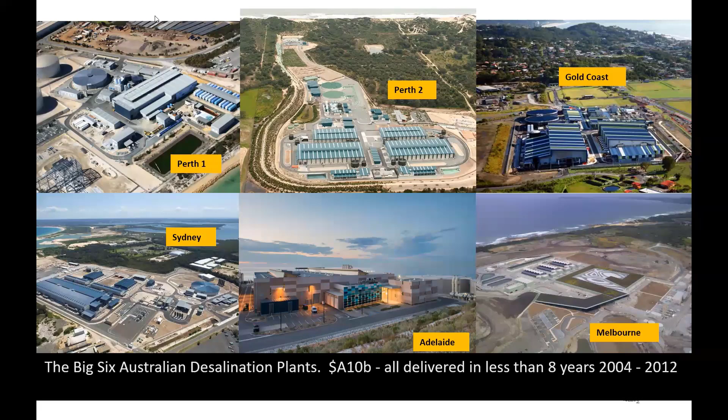The reason for the investment of $10 billion in water security measures was the millennium drought. It actually went for 13 years, from 1997 to 2011. This shows the rainfall for the period 2001 to 2009. You can see much of southeastern Australia is dark red, which is lowest on record. The drought broke in 2011 with floods in eastern Australia, which coincided with the completion dates of some of the desalination plants. Here are the locations of the Big Six. You can see they're spread, 2 in Perth and 1 in each of the mainland state capitals of Australia.

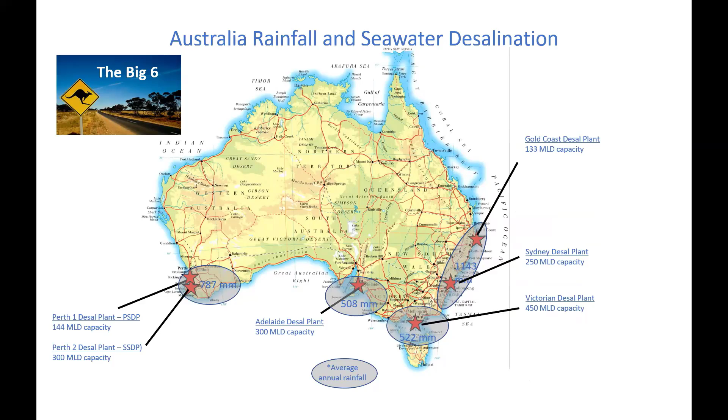If we move on, Perth's an interesting case study of climate change. Gary. Okay, as you can see, even though the precipitation didn't reduce that much, inflow reduced dramatically. From the early 1900s or 1941 right down to present, the runoff has gone from an average of 500 gigalitres a year down to as little as 40 this recent year. A few years ago, it was as low as 15 gigalitres. If you realize Perth uses 300 gigalitres a year and we only have 15 gigalitres flowing in, we've got a problem.

In the 70s, they started bringing in groundwater because they could drill to deeper depth and access deep groundwater, a kilometre below ground level. And in time, that was also depleting due to climate change, and demand was increasing. So in the early 2000s, along came desalination, which you can see in the orange colour. And more recently, a very small component is groundwater replenishment, which is also a form of desalination, just brackish water desalination. With the new plant about to be constructed at Alkimos, by 2028, almost 60% of Perth's water will be from desalination.

I just want to talk about a case study in Melbourne. Melbourne desalination plant was built. It basically languished for 5 years after commissioning without being used. It's quite large, 150 gigalitres a year. It's about a third of Melbourne's annual average water demand. Now, in 2017, we had an interesting severe drought for 3 years, 2017 to 2019. But we'll come back to that in a moment.

I've got some theoretical work which showed what would have happened. The first chart on the left shows what would have happened if there'd been no water restrictions. During the millennium drought, it would have run out of water by about 2009. The actual results in that period, 2003 to 2009, the very severe water restrictions. Melbourne maintained some water in the dams. With extremely severe water restrictions.

And then in the red box, here's a prediction which we did based on, had the desalination plant been available, the dams could have maintained their level without restrictions. It's a very powerful water security device that's been employed. Now, we'll talk about the cost of it later on, but I just wanted to go through that exercise. Now, it wasn't available at the time. Now, here was a real exercise.

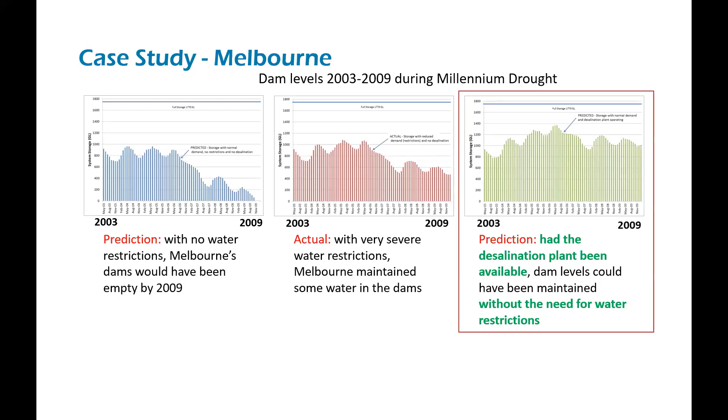And you can see on the photos, Thomson Dam is the principal water supply for Melbourne, and the Victorian desalination plant. So dam levels at the end of 2022 were 92%. It's been predicted without the desalination plant, they would have been at 69%, but restrictions would have been applied. So it did what it was supposed to do. It's like an insurance policy. You pay for insurance. You don't ever complain if you don't have a claim on it.

In this case, we operated the desalination plant in Victoria, and it continued to be one of the world's most livable cities, which is not the case if you've got severe water restrictions frequently, which was the case in the past. Just a note on the size of it. As Gary said, the capacity is 150 gigalitres a year.

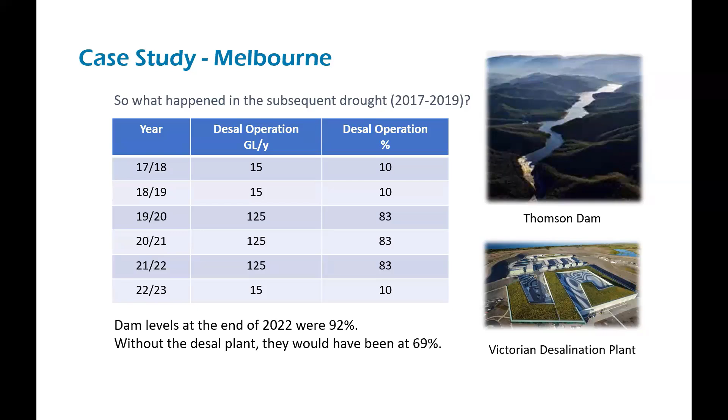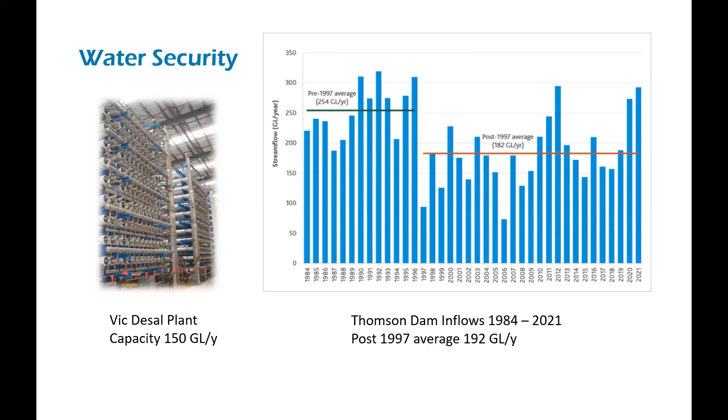If we move on, here's an update of what's likely to happen in the next 10 years in desalination in Australia. We work down from the Sunshine Coast desal plant, which has been announced as a serious contender by the Premier of Queensland.

You probably know there's a large recycling system in Queensland, the Western Corridor recycled water. It's worth 232 megalitres a day, but they're reluctant, I guess generally because of the yuck factor, to implement it. Don't know what will happen.

Belmont Desalination Plant is currently being approved and will be designed in 2024. Sydney Desalination Plant, it's been announced that there will be an expansion, a doubling of the size of it, which it was originally equipped to do. Victorian Desalination Plant, the next water supply for Melbourne is an expansion of Vic Desalination Plant by another 150 megalitres a day.

In South Australia, the Northern Water Supply, 260 megalitres a day, has been announced and will be proceeding, I think, in 2025, which will take water from Eyre Peninsula north to the mines of Olympic Dam, principally to reduce their dependence on Great Artesian Basin water. This is part of a hydrogen initiative for the South Australian government and will be completely renewably powered.

Then we've got the Alkimos desalination plant. And Gary, perhaps you can talk about the decision that led to that. Yeah, well, so first of all, Alkimos, I see we've got 250 megalitres, actually 300 megalitres a day in two stages of 150. In fact, the Water Corp is very, very proactive. So it's got plans for two desalination plants. One was a second plant adjacent to the existing Kwinana desal plant, also two stages of 150 megalitres a day.

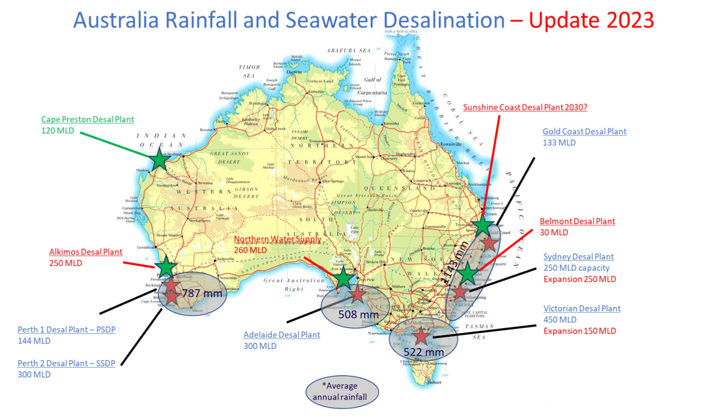And there's plans afoot for others deep into the future. There's also some plans, and I'll get into that later, on water recycling. Okay, but the important thing on this one is the decision was made, and at this stage, the technology favoured seawater desalination over water recycling. Okay.

This is just a list of those plants that we went through. You can see that in Australia, the expected increase in seawater desalination over the current Big Six is 65%. So I guess the policymakers and water utilities in Australia are saying that this is basically the way of the future to ensure water supply in the face of climate change and increasing demand through population growth. This also takes into account water efficiency measures, but with growth in population, there's an increase in demand that occurs.

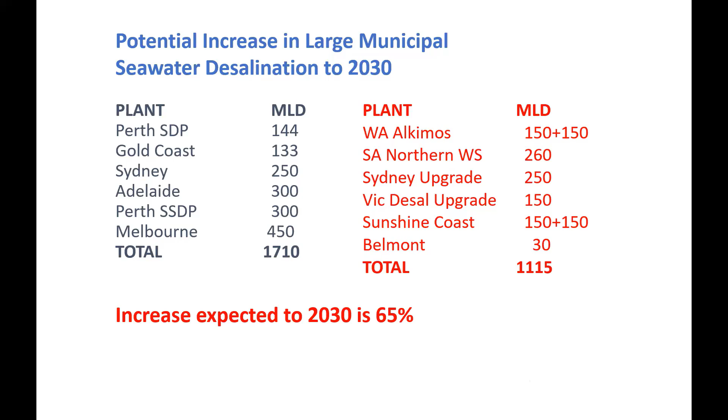If we look at some innovative types of technology that's being applied now. So Gary, back to you. Yeah, okay. And the reason we chose this slide is Neil mentioned earlier on in our pre-discussions about California being very strict on intakes, the abstraction of larvae and pulling in larvae and sea life into the intake. So in California, they're very strict on that. They cannot have open intakes, which we have, which is a velocity cap intake, or even a Johnson screen. They believe they cause impingement and entrainment.

So they've come up with this slant well system, and it's currently being contracted as we speak, even though they have been trialing it for about 15 years. It's at a suburb in Southern California called Dana Point.

It's going to be called the Doheny Desalination Plant, and this slant well goes into the sea. Initially, it's going to be pulling in some fresh water, so the plant's going to be designed to manage a mix of brackish and seawater, and ultimately pure seawater. So that's one way of getting around the very strict EPA regulations on open intakes. So that's one option. And I know the Water Corp is looking at those solutions for some of the smaller plants they're planning up and down our coast here.

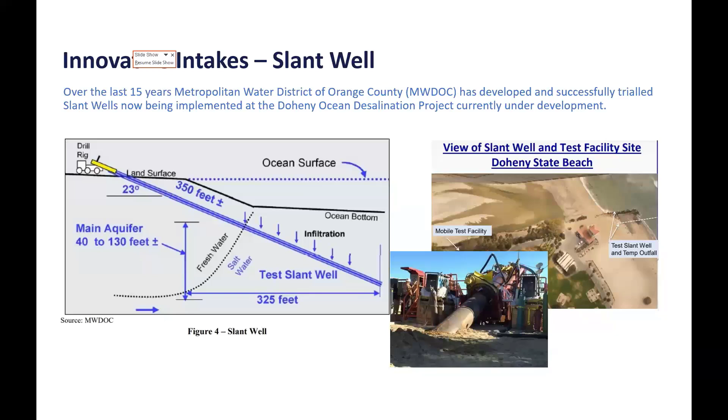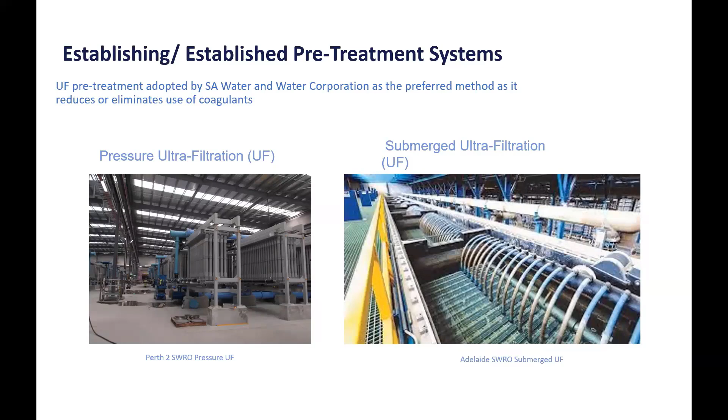We know that ultrafiltration has become fairly well established in pre-treatment. It's not that new anymore, but I've just put it down as the option moves away in places from conventional dual media filters and gravity filters or pressured media filters to ultrafiltration. But this is my segue into the next slide, which is, I believe, where we're going to end up in the future, and that's ceramic membranes for seawater pre-treatment. They've already been used for lots of applications in the food industry and in water treatment, but not so much for seawater desal yet, but there are moves afoot.

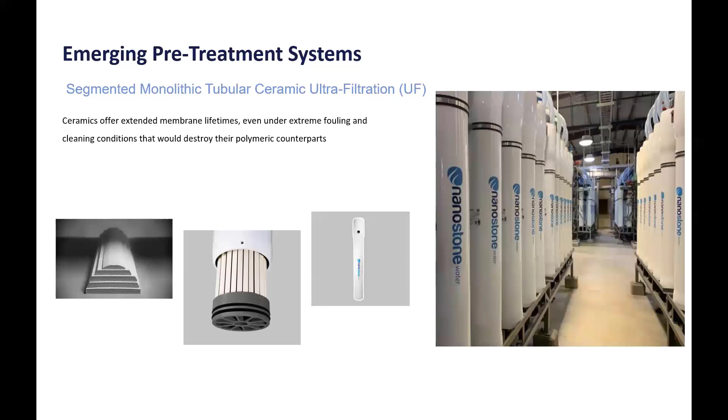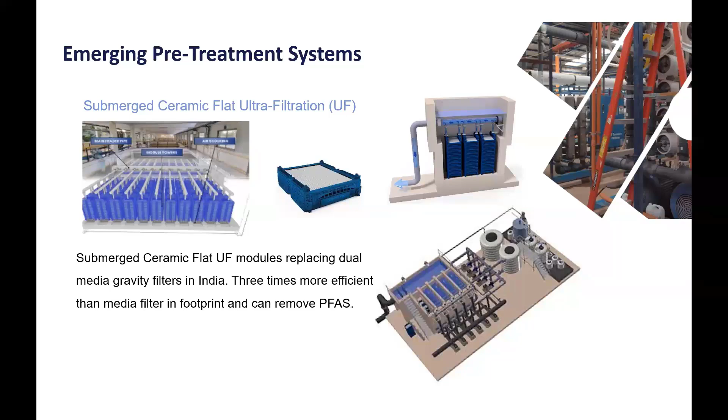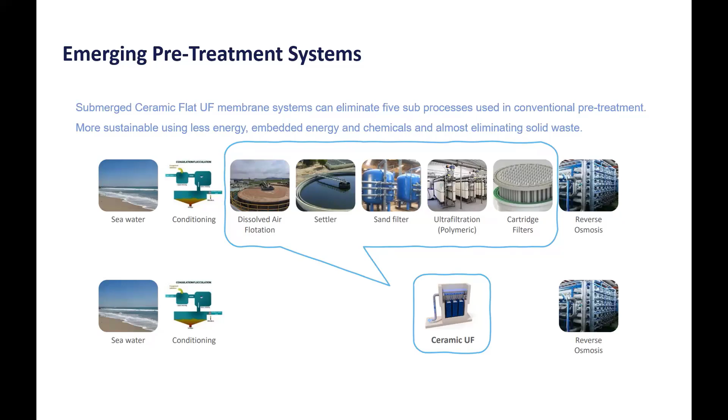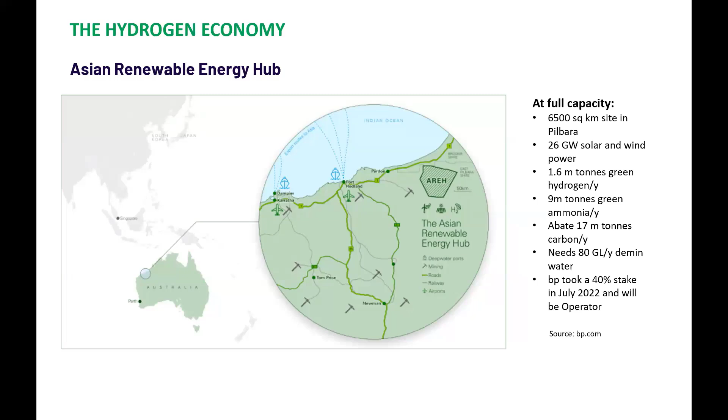Another one in South Australia is called the Port Bonython Export Hub, and you can see the size of this in northern Spencer Gulf. Once again, a number of projects shortlisted. The world's largest electrolyser is being constructed here as a South Australian government initiative. $13 billion of investment and producing 1.8 million tonnes of hydrogen by 2030. Once again, it will require demineralised water for the hydrogen supply. So there's a couple of examples of different projects in the future, in addition to the current desalination initiatives that have been taken in Australia, plus the increase expected in the next 10 years.

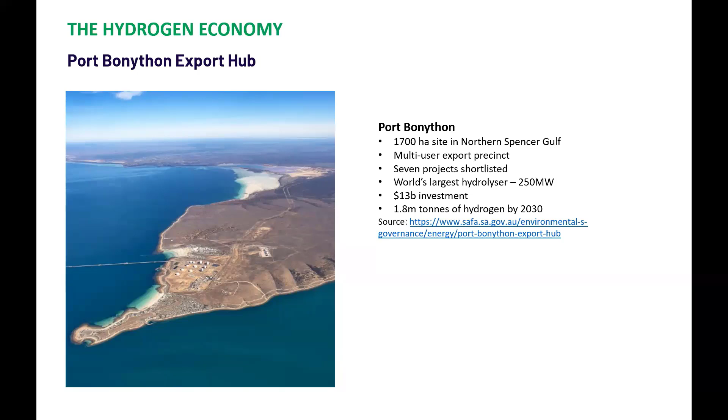Now, we touch on the price. I did an exercise in South Australia of the water rates from 2008, before the desal plant, to 2015, after the desal plant, and the net effect was $7.22 per week per household. If you look at the price of beer, here's a Fat Yak Pale Ale at the time in 2015. So the cost of water security in Adelaide is equivalent to one glass of beer per household per week. I guess you can ask people, are they prepared to pay one glass of beer per household per week for absolute water security? And I think the answer in most situations would be yes.

So to finish off, there's no shortage of water on Earth, but fresh water is limited. If you look from space, 75% of the planet's covered with water. We can convert it to fresh water. The strategic investment of $10 billion in major seawater desalination has brought affordable water security to Australia's five mainland capitals. And a planned 65% increase over the next 10 years suggests the initial investment was well justified.

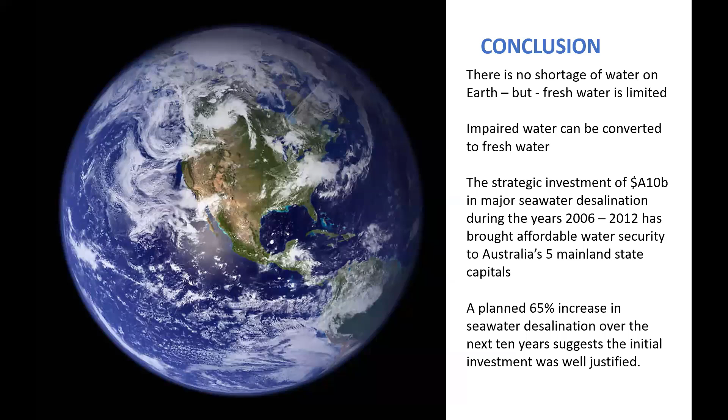We'll come back to you shortly. But let's go with George. I know you've been answering frantically some of these questions in the background about the environmental impacts. So let's start with George. If you just let us know, since those watching the YouTube recording won't see the questions that have been typed in, if you can just let the audience know what those questions were and what your responses have been so far.

Sure, yeah, I've been doing my best to answer questions as they've come in. There's been a few about brine discharge from desalination plants, particularly around the chemistry of the brine, which is effectively just seawater at twice the concentration returned to the sea. Questions around how exactly it is discharged, which is typically through a jet diffuser designed to mix the brine back into the seawater as quickly as possible.

And from my understanding, what we see at the major desalination plants in Australia is the mixing is very rapid, and you do see actually a greater growth of coral, or actually a productive marine environment at the brine discharge. There's no clear evidence of environmental damage from the brine the way it is discharged. There was, I think, another question alluding to CIP solutions, which use chemicals in desal plants. However, the cleaning is quite infrequent. It's a very small volume, and it's diluted in that outflow.